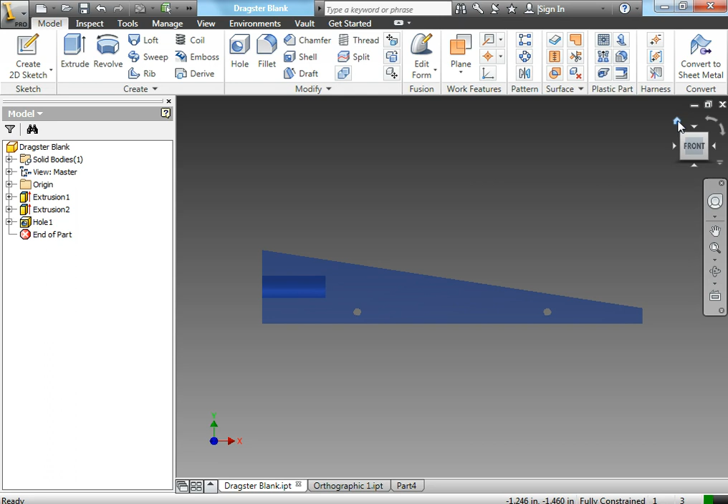Designing your dragster in Autodesk 2012. First, open up your dragster blank. This is the piece of wood you'll receive, and everyone will have to drill their CO2 hole and their axle holes in their blocks of wood. Please save this to your Z drive as Dragster Design 1.

This way you'll have two files that are the same thing, so if you make a mistake with your Dragster Design, you can always just open up your Dragster blank and be good to go.

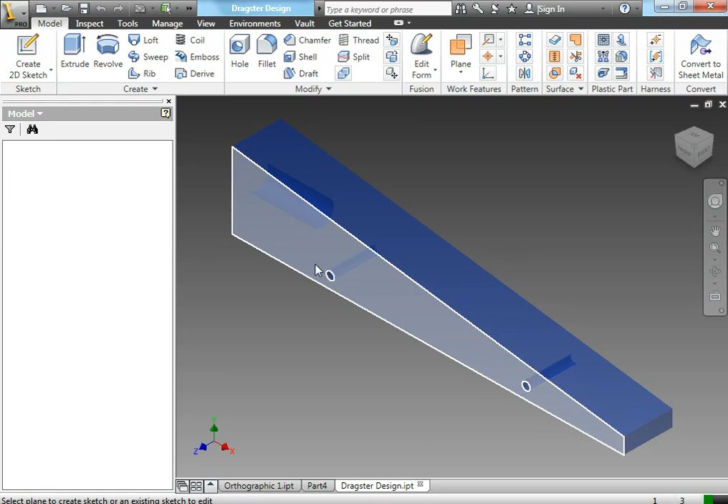Please create a 2D sketch on your side view. Start to think about how you want to design your dragster. If you want to use the bandsaw, you'll be cutting out straight lines. If you want to use the drill press, you'll be drilling circles and cutting them out.

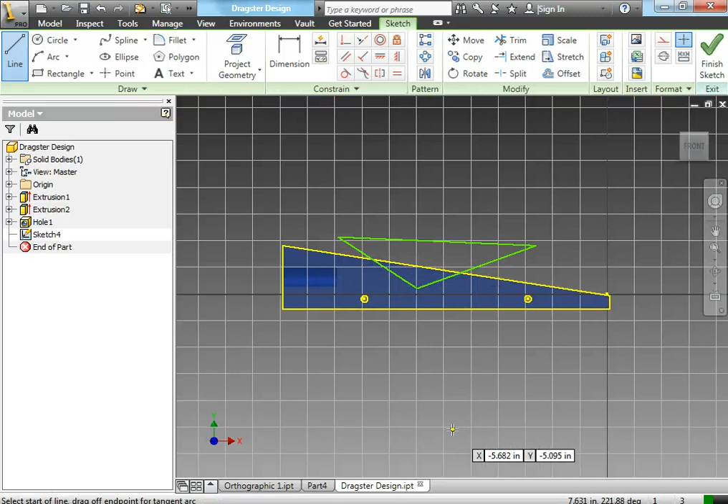We know that we can only extrude shapes. Therefore, if you were to cut this part of your dragster off, you actually have to make it an entire shape. A shape is where all sides are closed. I can then finish my sketch and use the extrude tool to cut that portion out.

Instead of joining it together, I'll use the cut option, and I want it to go through the entire dragster, so if I make it a large number, like 2, I know it will go through the whole thing. Looking at my dragster, if I cut that out, that would be fine.

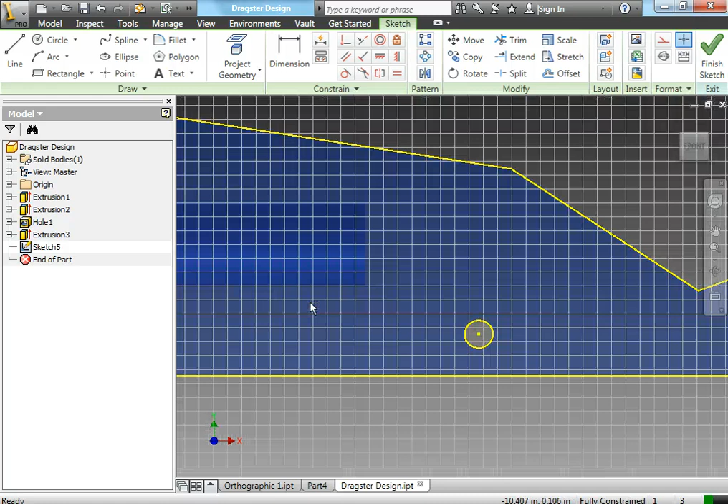You can continue to do this until you get your dragster whittled down to the block of wood that you want to actually erase. I would highly suggest making each 2D sketch a separate thing. You want to make sure that you're staying far away from your CO2 hole. That's why it's helpful to have the material be something clear so you can see through it.

So say that you want to have a spoiler in the back view, like this. You can then finish your sketch, extrude using the cut feature, cutting that all the way through and having that portion go away. Another neat thing to do is to have fenders.

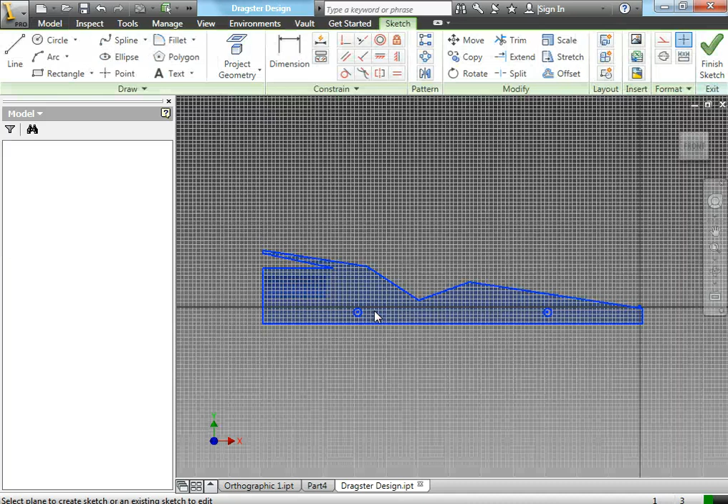A fender would allow your dragster wheels to be kind of inset inside your dragster. I'm going to use the circle tool and dimension that circle to be 1.5. That's the diameter of my wheel.

When I finish my sketch and I extrude, I'll select only this wheel and I want to cut into it 0.5. That way my wheels will actually be inside of my dragster. I would want to do this on the other side as well.

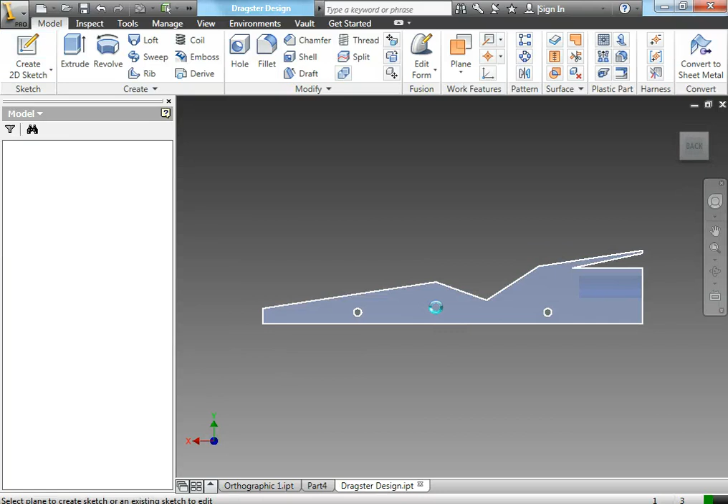So I would hit 2D sketch, draw my circle, dimension the circle to be 1.5, and cut it into my dragster by using the extrude tool. Again, it's important that I only select my circle, and I make sure by looking at my profile view that it goes inside.

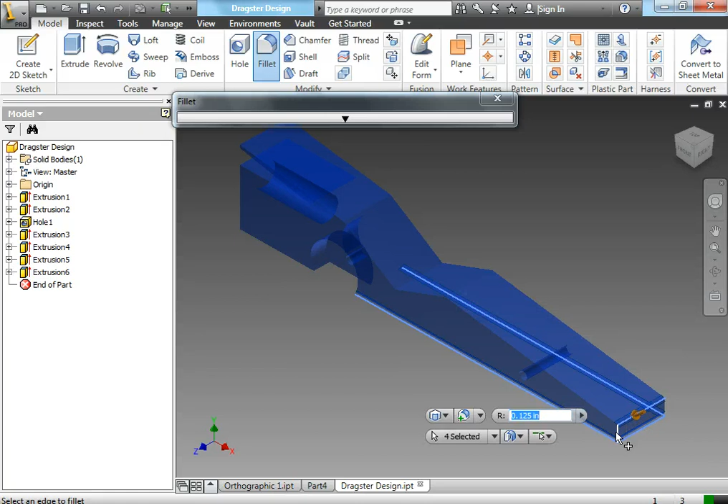Another neat thing to use, folks, is the fillet tool. In the 3D mode, if I click fillet, I can click an edge and it will round that edge. If you'd like to use the sander, that would be one way to show this on your dragster. I'm going to hit OK.

Now say that I do something and I don't quite like it anymore, like this extrusion way back here, number 3. That's why this side panel is very helpful. I can go through and edit things. So if I right click, I can say edit sketch.

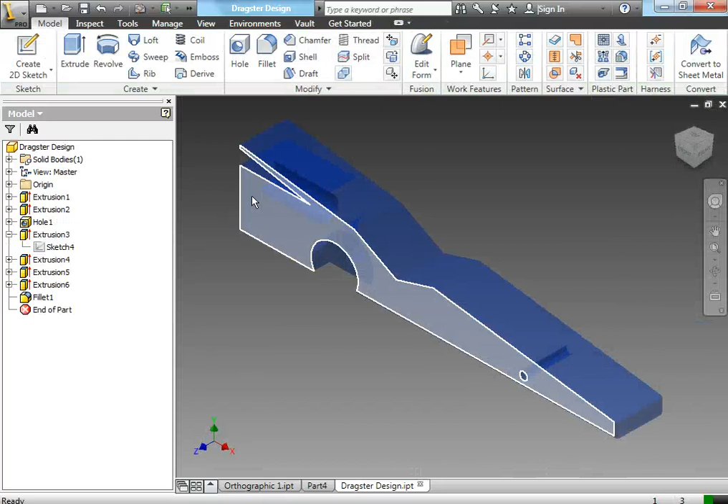If I want to just click and maybe drag this up a little bit, if I like that instead, I can finish my sketch and see if that looks better to me. If I don't like it at all, I could right click and say delete, and say OK.

When I'm doing my 2D sketches, another cool thing to use is called spline. Spline is a curvy line. So if I click, the next place that I click, that's where my line is going to start to bend.

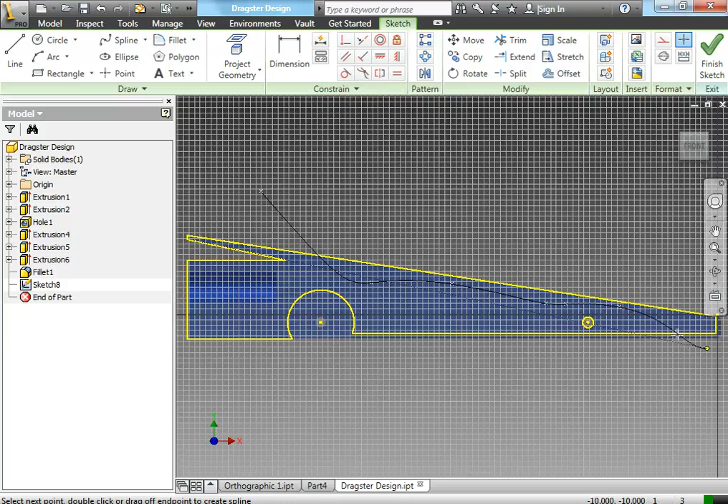So again, folks, please think of how you want your overall dragster to look. Say something like this. If I hit the enter button, that stays. I know that I need a full shape in order to extrude.

So again, I'll just use my line tool, draw outside of my dragster, so now I have a shape. Finish my sketch, click extrude, cut through all the way, so some large number like 2, select this, and it goes away. Please make sure that you're not only cutting things out of your side view, but also your top view.

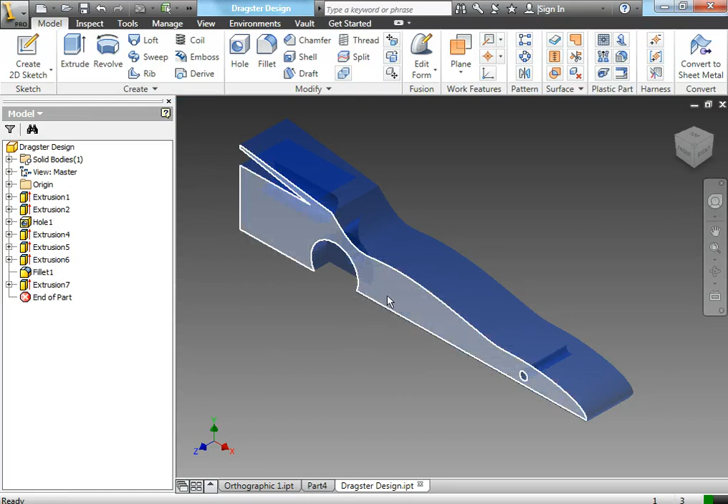When you go to create a top view, undo. If I go to create a 2D sketch in this view, perhaps it would be easiest if I sketched it from the bottom up. Again, you want to make sure that your dragster is lightweight.

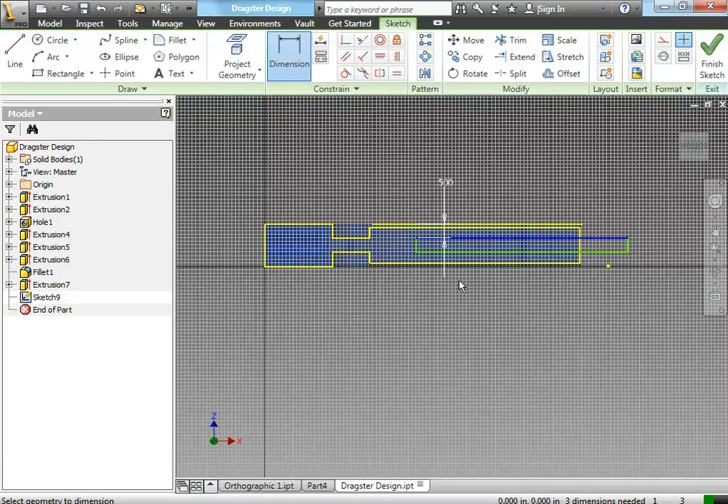Some ways to do that is to maybe cut out this portion here. I want to make sure that I at least have a 1/2 inch, and I just happen to have that. It's pretty amazing that it worked out that way. And I can...